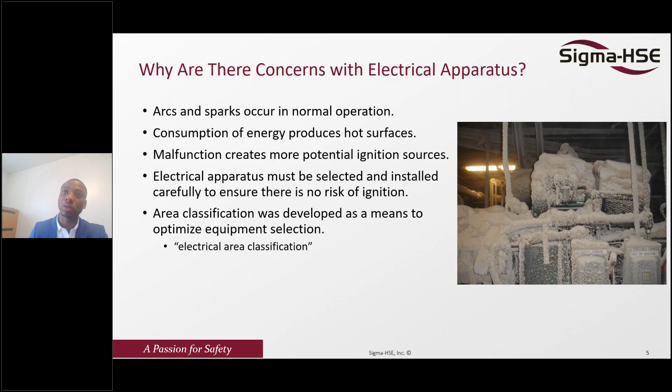Classification was developed to optimize equipment selection, and as I mentioned, the goal here is to select the appropriate equipment for a specific area.

The general purpose for hazardous area classification is to minimize the likelihood of ignition. If you want to get fire or explosion in an industry, one thing that needs to be considered is the ignition source - you could have the fuel, you could have oxygen in the system, or you could have an explosive atmosphere present in the area or process environment.

However, without an ignition source, this material cannot ignite because the combustion process will not be complete. So one thing we always need to consider is having a way to minimize the risk of ignition sources, or reduce the likelihood of ignition sources associated with electrical equipment in the industry.

There are several ignition sources which can create spark or hot surface from equipment. First of all is the motor, pump, agitator, or mixer - during these operations, this equipment can heat up or generate spark, and in the presence of an explosive atmosphere, that spark or hot surface can serve as a source of ignition.

The next aspect is fan or blower. As the fan moves or the blower operates, it can also create spark, and it can also have frictional heating.

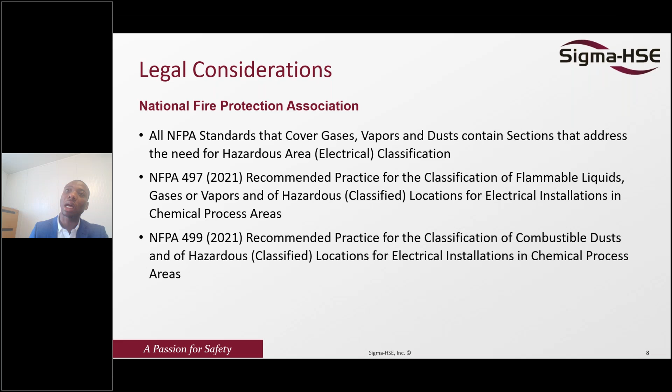The NFPA, that is the National Fire Protection Association, also has main standards that regulate or show us ways in which we need to apply this classification in the industry. We have the 497, which focuses more on classification of flammable liquid, gas, and vapor. And we also have the 499, which focuses on combustible liquid and combustible dust and fiber. These are the various standards that are applicable. When we go to Europe, we have the ATEX standard.

So first of all, we jump into the combustible dust section. The need to classify combustible dust, the various conditions that could trigger a combustible dust explosion. But first of all, let's try to understand why we classify combustible dust.

The first thing here is combustible dust can explode in the form of a cloud. That is something very common in the industry. When you have a dust cloud, we have oxygen, we have the right amount of confinement, we have suspension of this material, and an ignition source, automatically we can have a dust explosion. About 70% of the materials that we handle in the process industry are actually combustible.

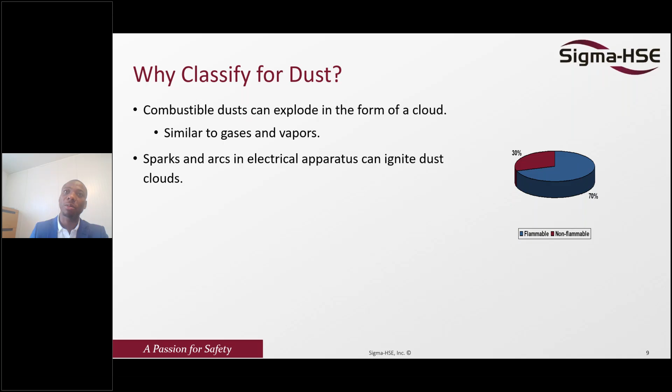The second aspect here, spark and arc in electrical equipment can actually ignite a dust cloud. Spark can generate energy up to 1,000 millijoules, and most ignition energies or minimum ignition energies of these dusts are less than 1,000 millijoules. So having the right concentration of dust in a cloud form, with any spark from electrical equipment, can serve as a source of ignition and ignite the material.

And also sometimes you have equipment which maybe is not rated well, and it generates heat. You have dust accumulation on this equipment which can ignite the material to get a fire hazard. So that is something that needs to also be addressed.

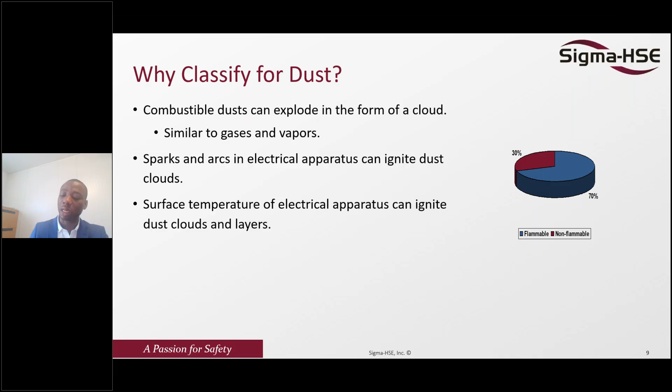So what is the condition for dust explosion to occur? The first thing that comes to our mind is dust explosion or dust fire is a fire hazard. And normally, in order for fire to occur, you need three main things: you need the fuel, the oxidant, and the ignition source. That is the fundamental for any combustion operation to occur.

So the fuel could be starch or sugar, and if you all know the Imperial Sugar situation, there was a sugar dust explosion that killed 14 people, injured a lot of people, and caused damage worth over millions of dollars. Also, we have oxygen in the air, which is always available unless you decide to exclude oxygen by inerting, introducing nitrogen or argon into the system to replace the oxygen. If you don't do that, the oxygen is always available. Also, we have an ignition source, which could be spark or electrostatic discharge - there are almost 13 various ignition sources that need to be considered. But for this presentation, we're going to consider more into spark or hot surface from electrical equipment.

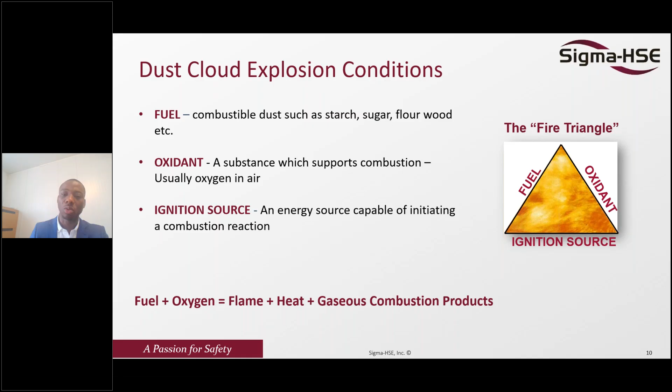For a combustible dust explosion to happen, unlike a general fire, we need fuel, which is very important, maybe sugar. Then we need oxygen in the air, and we need an ignition source. If we have fuel, oxygen, and ignition source, we are going to get fire. That is the normal fire triangle.

However, if we have dispersion, now we have four elements: fuel, oxygen, ignition source, and dispersion. In this case, we create something called a flash fire, because we don't have confinement to retain the heat or energy released in the system.

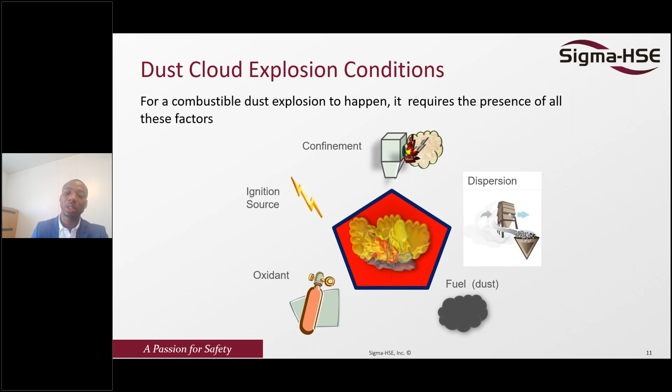However, if we add the fifth element, confinement, such as a bag house, a silo, or a bin, all the energy or heat released from the combustion is retained in the system until the pressure released is more than what the material or equipment could handle. Then we could have an explosion. So these are the conditions that could lead to a dust explosion.

One thing also very important in the industry is secondary explosion. This happens when you have the first explosion and a lot of dust accumulation in the operation, where the heat release or pressure wave from the first explosion shakes the whole system, letting the dust fall down. Then the flame from the first explosion ignites that dust cloud, causing a secondary explosion.

Secondary explosions are actually much more intense and devastating compared to the first explosion, because they involve a larger volume, a larger amount of dust in the whole system.

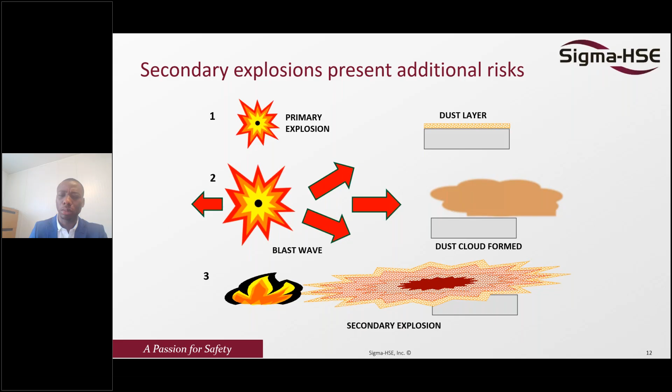The National Electrical Code has grouped some of these dusts that we handle across various industries. So normally, if I come to your facility to classify your equipment, the first thing that comes to mind is: what type of material do you handle? What group does your material fall into? The NEC actually gives three definitions of groups for combustible dust.

The first group is Group E, which focuses on combustible metal dust, such as aluminum, titanium, magnesium, various alloys, and various kinds of steels that we handle in industry. All of these fall under Group E.

We also have Group F, which focuses more on carbonaceous materials such as coal dust, carbon black, charcoal, and so on. All those carbonaceous materials fall under Group F.

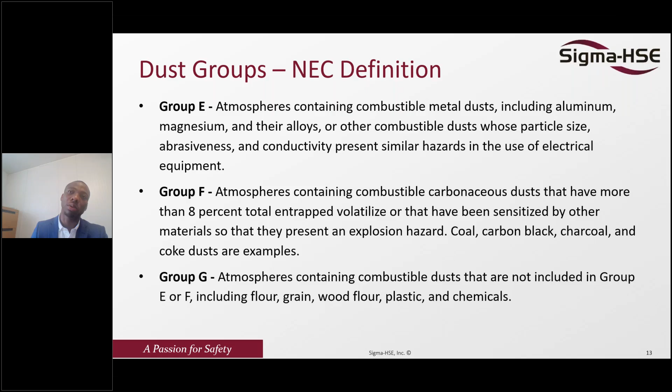Group G covers the most common materials. Any material that does not fall under F or E is grouped into G, which could be wood, flour, plastic, and other chemicals we use in daily life. So usually, if I classify equipment, I need to add the group for that classification.

I have this table here to help distinguish various classes and divisions compared to the North American system and the European system. In North America, we use classes, and in Europe they use zones according to ATEX. In North America, we have three main classes.

Class 1 focuses on gases and vapor. Class 2 focuses on dust. Class 3 focuses on fiber and flyings. So that is something we always need to understand. If somebody indicates this is a Class 1 area, our focus needs to be on gases and vapor. If it's a Class 3 area, you are handling fibrous material, or Class 2, which is dust.

When it comes to Europe, we have zones: Zone 0, Zone 1, Zone 2, all of which fall under gases and vapor. Zone 20, 21, and 22 are for combustible dust. So unlike the American system, which separates dust from fiber, the European standard combines fiber and dust into one specific group: Zone 20, 21, and 22, covering both dust and fiber.

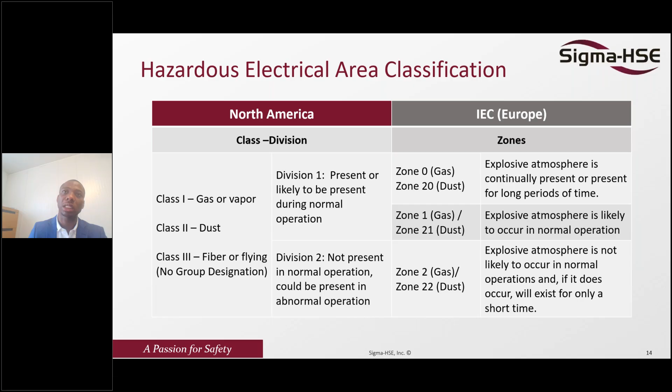In North American standards, we don't actually classify inside equipment, but in the European standard, they classify inside the various equipment. We also have division 2, which focuses on areas where you could have an explosive atmosphere, but not under normal condition or operation. Maybe under abnormal condition, you could create a dust cloud, or a gas vapor could be released. So these are the differences between the European and American standards, in terms of classes, divisions, and zones.

So let's go to class 2 division 1. When we mention class 2, automatically what comes to mind is combustible dust, and division 1 location. A division 1 location is a location where combustible dust is in the air under normal operating conditions, in a quantity sufficient to actually produce an explosive or ignitable mixture.

So what is an ignitable or explosive mixture? It's where we have the right concentration of dust and air combination that could actually ignite, where the concentration is above the minimum explosive concentration. Minimum explosive concentration is the least amount of dust in the air that could actually ignite. That is what is termed the explosive or ignitable mixture, or when mechanical failure or abnormal operation of equipment might actually cause an explosive or ignitable mixture.

So under normal operation, you're not expecting to get this explosive atmosphere. However, under an abnormal situation - and I consider this like a bag dump area again - sometimes you try to dump the material gradually, but what happens when there's a big spill? You create a very dense dust cloud, or maybe you have a dust collector where the bags actually break, creating a lot of dust cloud, or equipment where the hose disconnects, which can also create a dust cloud.

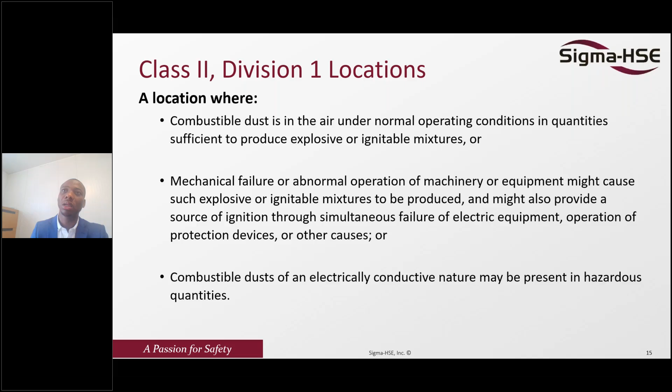I went to a facility where they had various hoses for transfer of material, and the hose actually came apart, creating a lot of dust cloud and dust layer, which led to a fire hazard. So under normal operation this was not expected, but under an abnormal situation it created such a hazard. Also, anywhere there's metal dust, it's always division 1 - there's nothing like division 2 for metal dust. So if you handle aluminium, titanium, zirconium, steel, or iron - any kind of metal dust - automatically you'll be classified as class 2 division 1.

What about division 2? Division 2 is where combustible dust is not normally in the air in a quantity sufficient to produce an explosive or ignitable mixture. So under normal situations, you're not expected to get a dust cloud that can produce an explosive mixture, but under abnormal situations you can create that. Also, where dust accumulations are present, normally insufficient to interfere with normal operation, you could still have a lot of dust accumulation there.

As I mentioned initially, a dust cloud can happen when you have a dust layer that gets disturbed, and this can create a secondary explosion. So dust accumulation at a sufficient amount can also lead to a classification of the area or equipment - I'll go through a table to explain this.

So which areas could be considered unclassified? First, areas where materials are stored in sealed containers - bags, drums, fiber pack, pallet, or rack - as far as they are sealed in their containers and the material isn't released to the immediate environment, are always considered unclassified. Also, areas where material is transported in a well-maintained closed pipe, such as pneumatic conveying pipes where materials are sealed, don't need to be classified.

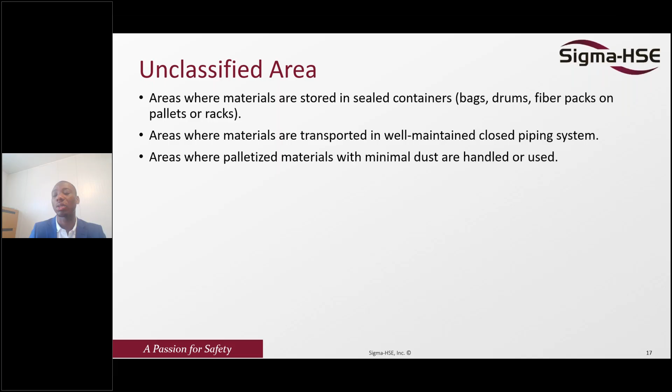Also, areas characterized by minimal dust, where you don't create any kind of dust in these operations, don't need to be classified. Where there's a closed tank or storage building, you don't need it either. And where you're able to clean the dust such that you cannot actually use your hand - normally when I go to various operations, I use my hand to check, to see if I can write my name in the dust.

If I can write my name in the dust, then I say okay, you have enough dust cloud, or where you don't have a lot of dust, which is less than 1/32 of an inch, in this case you could consider the place as unclassified. Where you have good housekeeping, because normally in the warehouse or production area, you don't generate a lot of dust. Where you normally create dust is where you have blending operations, powder transfer operations, maybe sifting operation areas where dust could actually come out from the operation. So this is the table I was talking about.

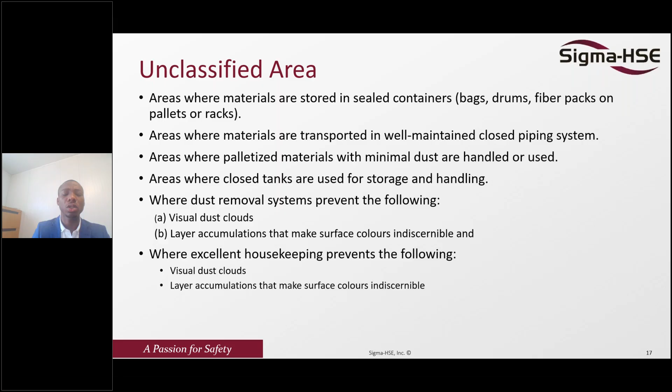So we can also use dust accumulation level to classify an area. We have division 1, which is when the accumulation is greater than 1/8 of an inch, and between 1/8 of an inch to 1/32 of an inch, you can classify the area as div 2. And where you can't see any dust in the area, or maybe less than 1/32 of an inch, you don't need to classify the area.

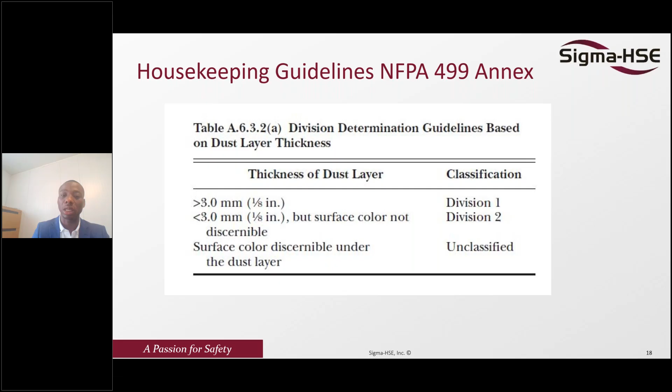I brought a typical example which I copied from NFPA 499 to show you the various levels of classification. Where we classify as class 2 div 1, usually where we think dust cloud in a specific quantity can form maybe an explosive atmosphere. Usually the classification is 20 feet from the source of the maybe-explosive dust cloud needs to be classified as class 2 div 1. So that is the number, 20 feet.

So we assume that within 20 feet, this dust cloud, in case there's any equipment, the material or the cloud could actually travel, which could serve as an explosive atmosphere. And if you have unrated equipment that can generate a spark or arc, it could actually ignite such material. And also beyond the class 2 div 1, then you can classify as div 2, and div 2 is always 10 feet radius from the source. So that is how the numbers are given in case you want to classify equipment.

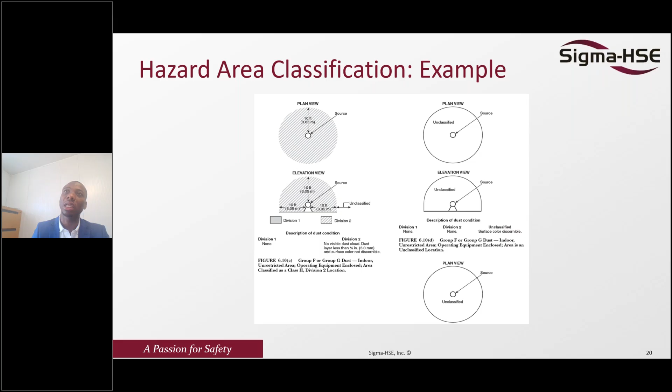But one thing that needs to be considered here is, do I have an explosive atmosphere? Do I have the right amount of dust cloud in the air, or maybe a dust layer which is more than 3 millimeters or something like that? And also in case you want to classify an area as class 2 div 2, it's always 10 feet from the source. So if it's a bag dump area, then you need to consider 10 feet radius from the source. And for unclassified areas, you don't need to classify from the whole system there.

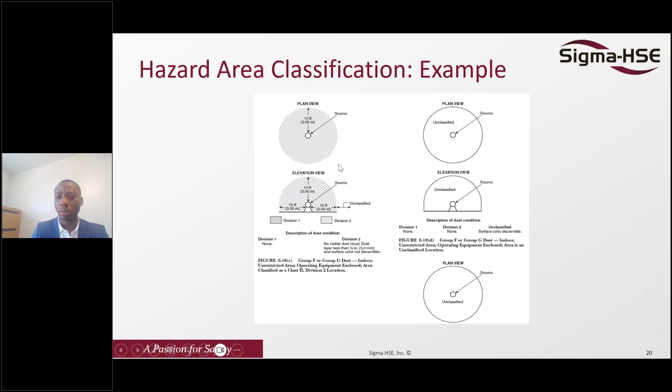And also when it comes to division 2, then we can consider NEMA 4 or NEMA 4X type of equipment. Normally your equipment is always rated, and they write the rating on the equipment. So if you think your area is generating a lot of dust cloud in the air that could serve as a source of explosive atmosphere, then you need to know what type of equipment you'll be selecting.

Usually when I do area classification for combustible dust, I tell people the only way you can prevent dust accumulation issues is to make sure the place is really tidy, because these types of equipment are super expensive. So if there's a way you can keep the place clean, that's always the best. Or if there's a way you can keep the dust from coming out to form an explosive atmosphere, then you need to do that. Or if you can install a local exhaust ventilation to capture the dust into a dust collector, then you can do that.

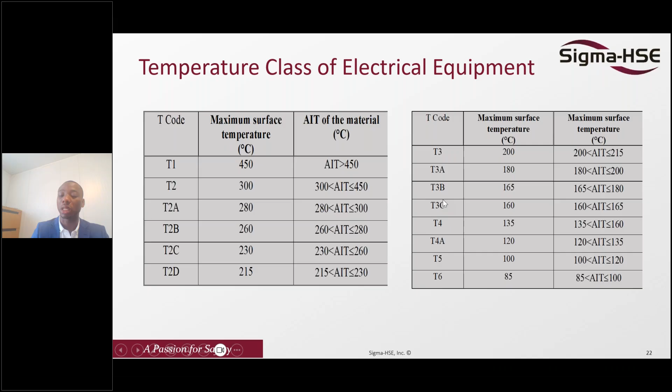So if you have a dust cloud, maybe the material you are handling has an ignition temperature of 300 degrees C. Then you know that you're going to select equipment which is sort of a T2 type of equipment, and the producers of this equipment understand those things. We also have layer temperature, based on the surface temperature of the material, which we can determine in our lab in UK where we can do all these tests. So based on the ignition layer test or ignition cloud test of ignition temperature of cloud or layer, we will be able to select the appropriate equipment for your facility.

What about combustible liquid, or liquid or gases? Usually you still need this triangle for ignition of a cloud of mist or vapor or gases. You need the fuel, which could be natural gas or toluene or any kind of combustible or flammable liquid that could be present at your area. You also need the oxidant, and you need the ignition source.

Normally for liquid, you need to know the flash point, because if the flash point is above the atmosphere or operation temperature, automatically you're not going to get a vapor which is going to ignite. We need to know the flammability limit of this material to know whether the amount of gas or vapor released into the environment is going to be within the flammability limit range or explosive range. And we also need to know whether we have sufficient oxygen.

As I said, in case you don't exclude oxygen from the operation, automatically you are going to get oxygen in the air. The way to exclude it could be nitrogen purging, argon, or carbon dioxide. If you don't do that by inerting, that means you always have oxygen available in the system.

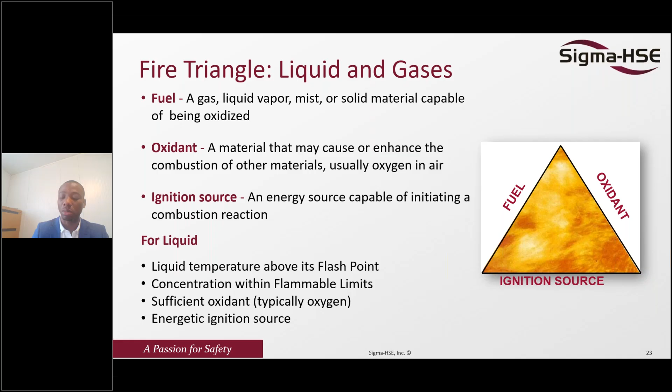I just presented some flashpoints of various materials, and for liquid we have various classes. We have 1A, where the flashpoint of the material is less than 73 degrees Fahrenheit. We have 1B, 1C, and class 2, class 3A. All these are something we normally need, before I come to a facility for classification of flammable liquid, to know whether under normal operation you are going to create a cloud of vapor in the system, and also I need to know the auto-ignition temperature of these materials.

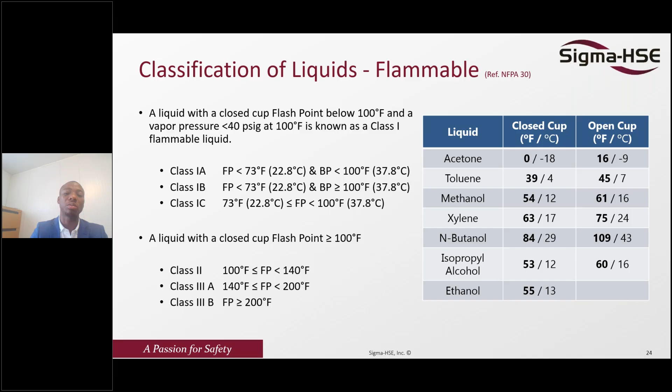So how do we define class 1, division 1? Class 1 is always flammable gases, vapor, or liquid. Division 1 is where you have explosive or ignitable concentration of flammable gases or liquid that actually produce vapor, because liquid in its pool form is not going to get any explosion hazard. It can burn at the surface, that's why we need a flashpoint. But in the vapor form, it can easily ignite.

So where these liquid, gas or vapor actually exist under normal operation condition - where maybe you have an open system, like for liquid where they have a sampling point, this kind of operation automatically will generate vapor under normal operation. And also where you have a concentration of liquid that is always above the flash point under normal operation, in this case you could actually create a division 1 environment.

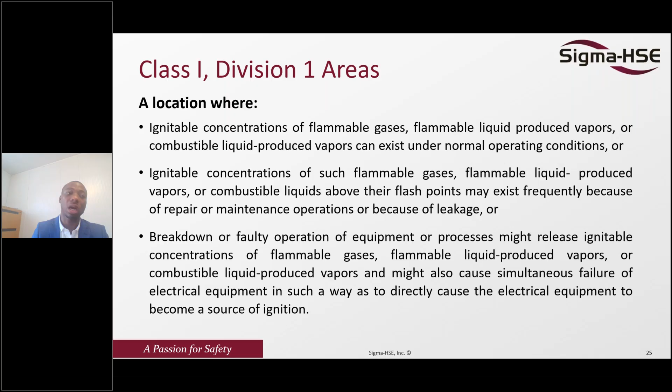And also when we know that breakdown of a faulty process might release ignitable concentration of vapor - in this case, if we are certain that in case something happened to this system, automatically we are going to create an explosive atmosphere, that means we need to also classify the place as division 1.

What about division 2? Division 2 is where volatile flammable gases or flammable liquid are handled, processed, or used, but the liquid or vapor will normally be confined within a closed container. So normally, in case the place is an open environment, under normal operation you are not going to create an explosive atmosphere. There's a possibility of generating material, but not creating explosive atmosphere, because of a good ventilation system which is going to exhaust the material into the atmosphere, so you will never get an explosive atmosphere under normal operation. However, under abnormal operation where the system could rupture, at flanges or various valves, in case there's any abnormal situation you're going to have a leak of gases or vapor, and in this scenario we can classify the place as division 2.

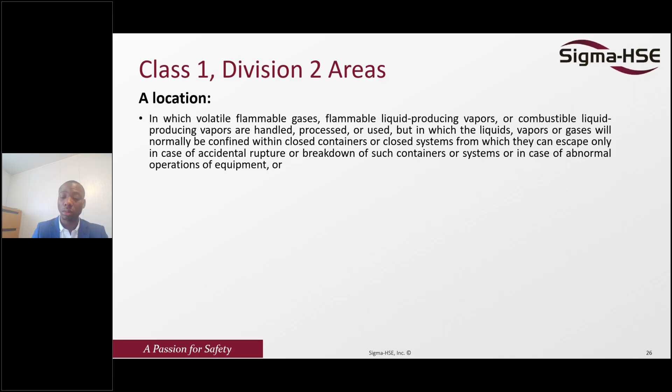There's also positive mechanical ventilation to consider. If you have positive mechanical ventilation, that might become hazardous through failure. Sometimes we control flammable atmosphere in industry using a positive ventilation system, which could reduce the amount of material cloud or vapor generated in the system. However, in case that ventilation system's fan or blower breaks down, you're going to have an explosive atmosphere. In this case, we still have to classify the area as Division 2.

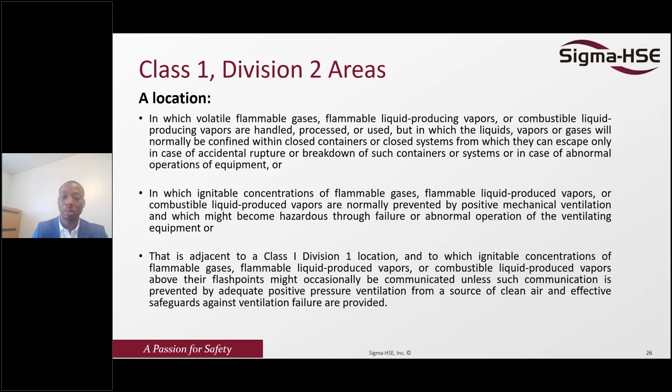So let me move to the next one here. Where do we consider an area as unclassified? Where adequate ventilation is provided, and where combustible materials are contained within a suitable, well-maintained closed pipe.

So number one, you could have a really good negative ventilation system, where you believe that automatically you are not going to have any kind of dust cloud or gas vapor in the system. Then the place should not be classified.

Also, where you have a well-maintained closed piping system, where there's no flanges or anything that is going to burst or release any gases or vapor, in this case we should consider the place as unclassified.

And also where adequate ventilation is lacking, but where piping systems are without valves or fittings, as I mentioned, where you have no fittings, flanges, or similar accessories that may be prone to leak - in this case, you don't need to classify the area.

Where combustible materials are stored in containers - for example, in a sealed container in a warehouse - that means you don't need to classify, because even if there's a release of this material, you're not going to have a vapor pool since they are below atmospheric temperature. So you're not going to have vapor above atmospheric temperature to create a cloud.

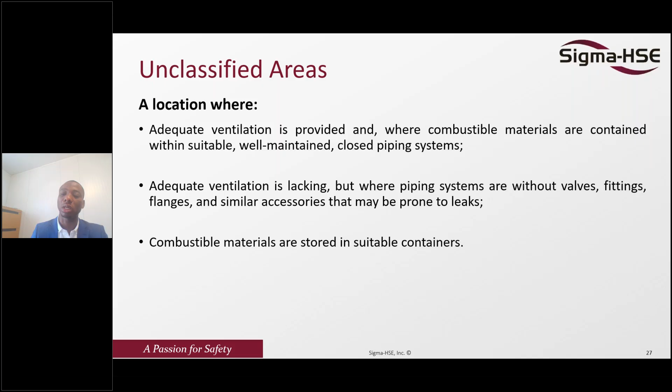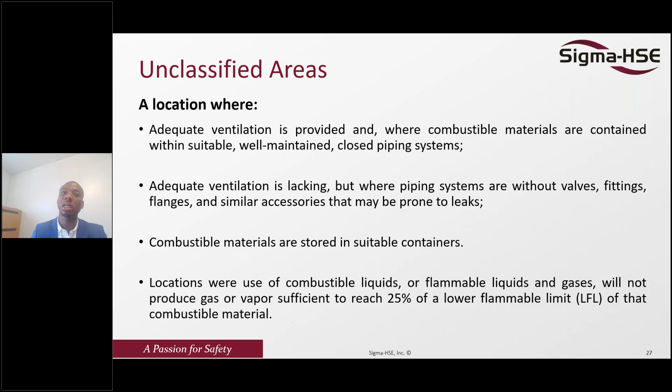Also, a location where the use of combustible liquid or gases will not produce a gas or vapor sufficient to reach 25% of the lower flammability limit. Normally some processes have concentration meters to determine the flammability limit. If a risk assessment has been done and we know the concentration will never exceed the lower flammability limit, then we don't need to classify the area.

So what are the various types of protection or intrinsically safe equipment or installations that we need in flammable atmospheres? The first is 4 to 20 milliamp DC instruments - these kinds of equipment are intrinsically safe. Two-wire transmitters and various thermocouples also naturally come as intrinsically safe, meaning they won't create a spark or hot surface that could ignite materials.

We also have various other equipment types for Division 1, such as explosion-proof equipment. Explosion-proof equipment is tight enough to prevent vapor or gas from penetrating into the system, and won't generate a spark or arc. We also have intrinsically safe equipment, purge or pressurized equipment, and NEMA 7 explosion-proof equipment. All these types can be used in a Division 1 area, that's Class 1 Division 1.

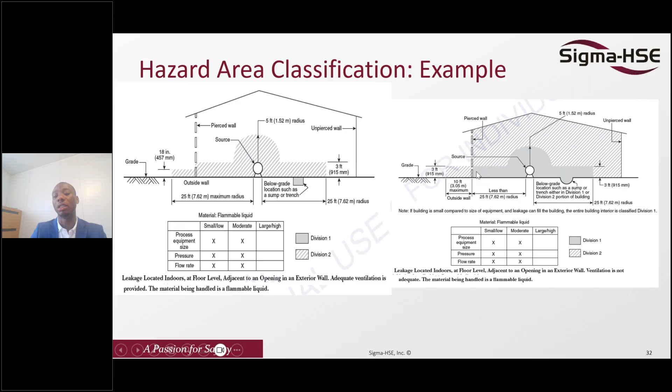And if it is division, after division 1, we need to always do division 2. Let me come back here - this is a diagram I picked from NFPA 497. So we have a source here, and for division 2, we have 25 feet from the source and 3 feet from the source to the top.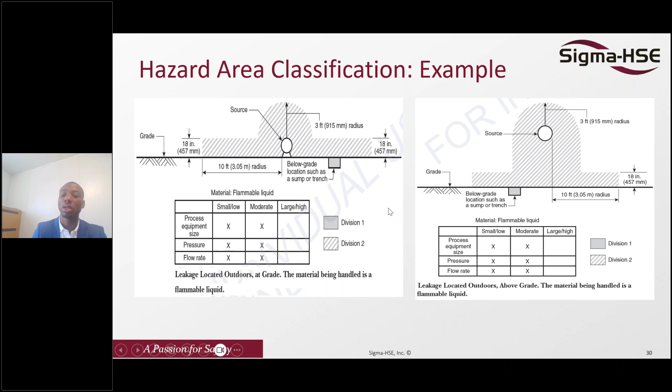A lot of factors actually influence it, and there could also be a pressure factor in case the material could be pressurized - that means the extension of classification could go further. And if it's normal atmosphere condition, in this case you need to have the normal classification.

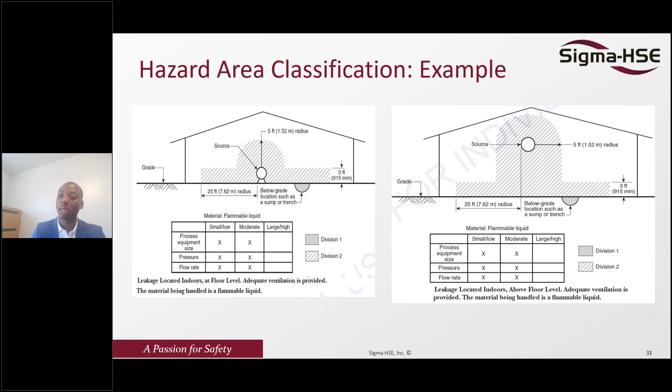And if it's also an elevated system, on the right picture you can see how it's being classified. Usually it goes 25 feet from the ground, and either 3 feet or 5 feet.

I think that brings us to this. I know people have questions, so I wanted to cut things short so we can have more discussion. That brings us to today's webinar. We have a full, maybe 2-day training on area classification. This webinar is just to give a general overview of classification, to understand the various divisions and classes, and the type of materials that fall under various divisions and classes, and also the various types of equipment.

However, in case you want more details with various examples on classification, how we go about it, you can contact us directly, and it can take a whole day to do this. So this is just a general overview, and thank you very much. In case you have any questions, I'll be available to answer them here.

I think there are some questions here that I need to answer. The first one is from Estelito Ragels Jr. He said, is it possible to consider an area with stored material as Division 2 because there is a possibility of release of such material by accident? That is true - if there is possible release, the point here is possibility.